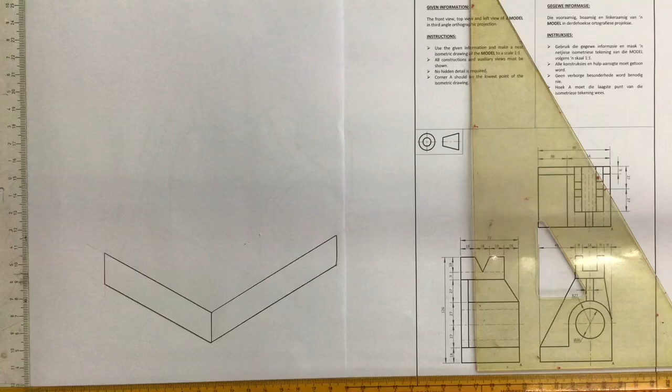Right, looking at doing this isometric drawing over here, you can see I've already drawn that base part. I've drawn a little bit of line over here, which I'm going to show you how to rub out so that you don't make that mistake.

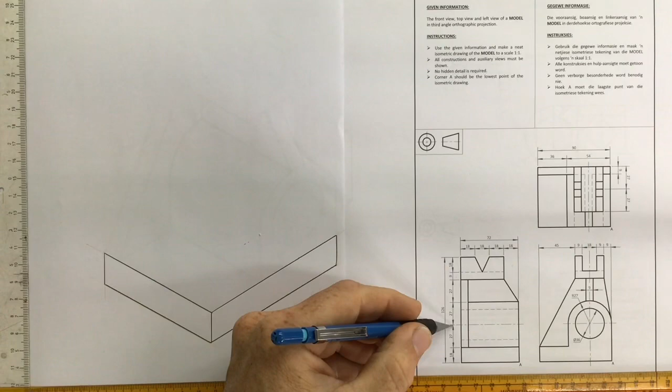The big thing here, I always like to say, find your center lines. It says that you've got 27 millimeters going up there and a radius of 27. So I'm going to take my pair of dividers and get the 27 done. Go from the corner over there, mark off your center, draw a center line going up, long dash, short dash, going all the way up.

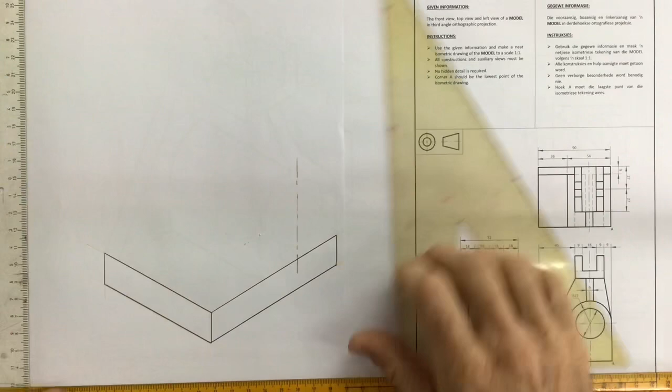And on that same line, that same 27 millimeters, swing it up there so that you find the center of that circle. Long dash, short dash, long dash, short dash, long dash, short dash, long dash.

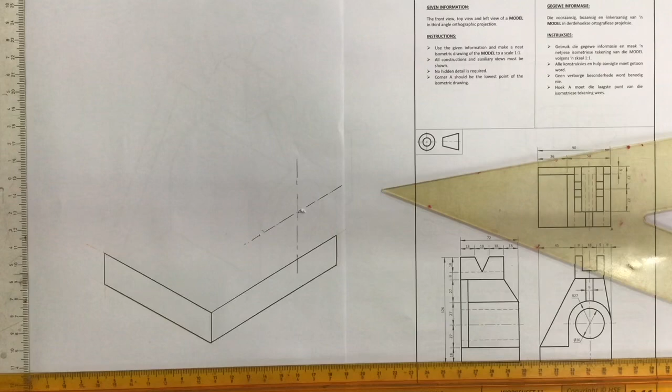Okay, take your pair of compasses, set them to 27. Place it at the center. Mark off your 27 there, and mark off your 27 there, and mark off your 27 over there.

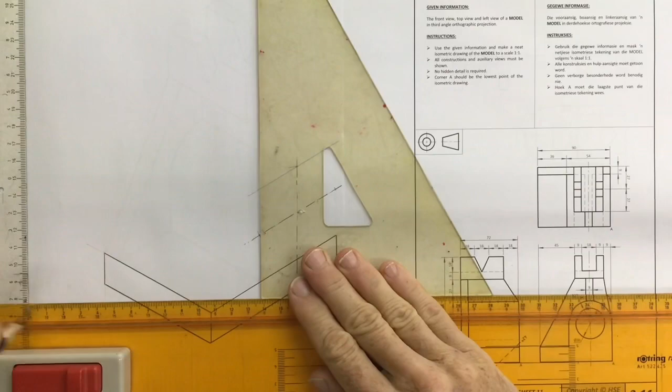Once you've got that in place, you can then draw in that square that you need in order to draw the arc.

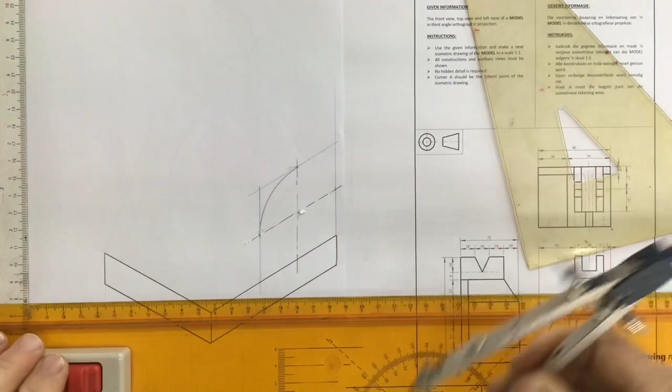There you go. Okay, once you've got that, you can set your pair of compasses to that radius over there, and you can draw in that arc successfully. Keeping that same center, you can see that this arc needs to be drawn further back over here, and you should be able to find that distance somewhere on this thing.

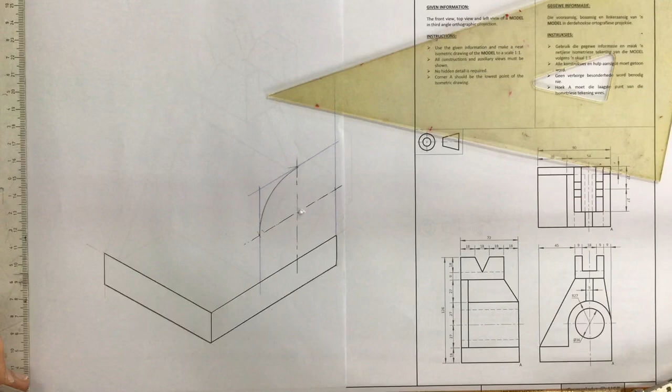It says that you've got 9 millimeters from the back there, so you measure off 9 millimeters. Coming over here, mark that off over there, and draw a line coming across.

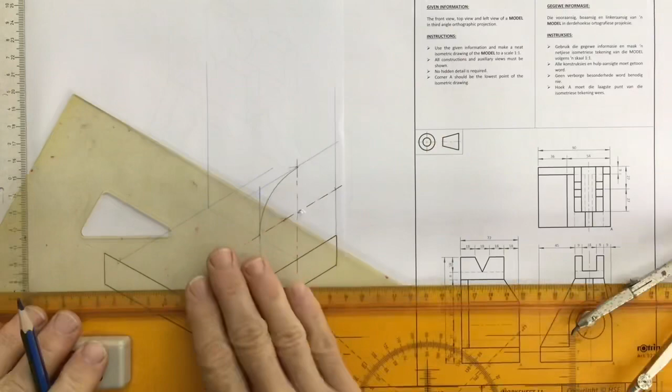You can take your center from there, going across there. Find your center going up there. Take a center line going across, draw this in dark, long dash, short dash, long dash, short dash, long dash, short dash, long dash.

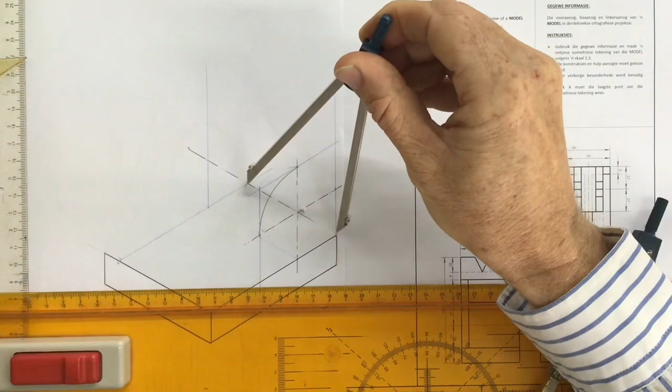And you can now measure off, using your pair of dividers, that distance over there, from there to there. Take it to that arc over there, from that corner over there, mark that off. Your radius that you just drew over there, take that back over there, and you can draw in a secondary arc going over there. All right?

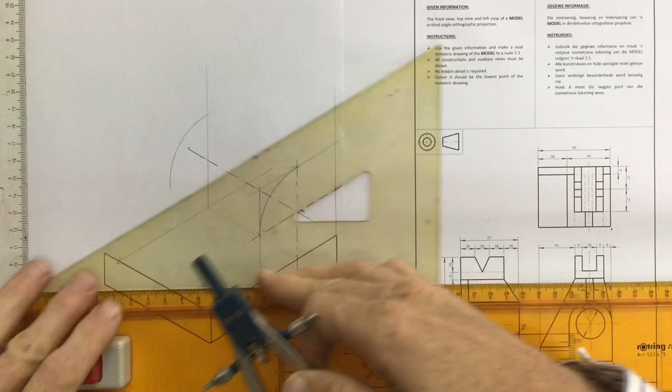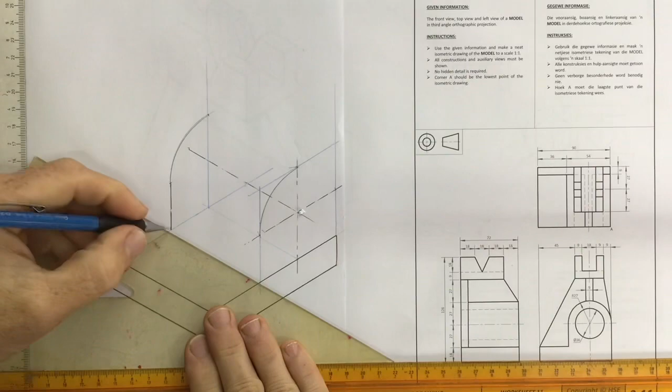That point and that point, you can darken that arc in nicely. Okay, drop a line down over here, take that line across over here, take that line up over there.

Right, we've done those two arcs. I need to find that little arc over there. I'm going to draw a construction line going across this square over here.

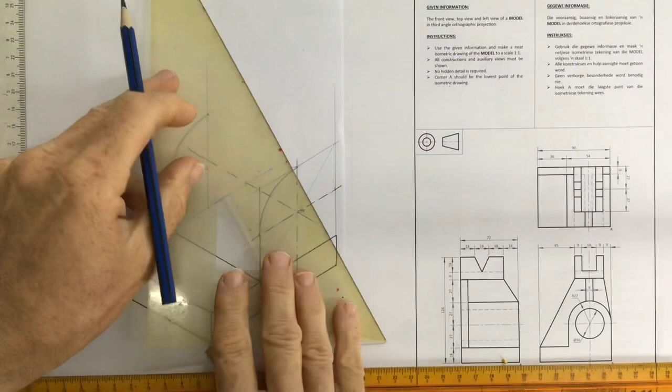I'm going to take a line, a construction line, going from that corner of the blue square over here up to the center over there. I can then take my pair of compasses, place it in at that point over there, arc that off with that radius over there, and you can then draw in that little arc over there successfully.

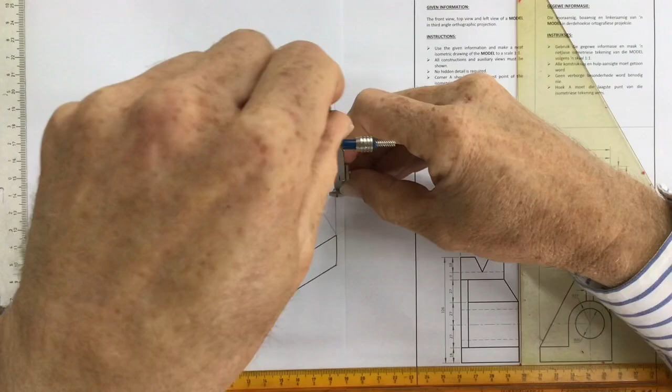Right, I don't think you'll be able to see the arc on the other side. If you were able to see it, you could then take that back, the distance between the centers over there. You draw a line out from there and make that mark.

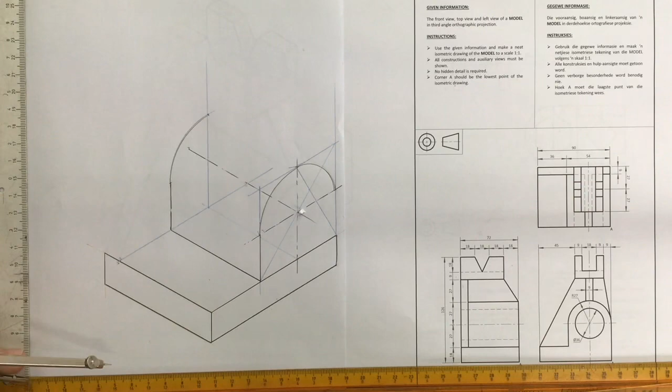Right, continuing here, what we need to do is we need to try and figure out this distance over here. It's 126, it says. I'm going to bring my pair of compasses or dividers, 126. I'm going to draw a line going from the base over here, going all the way up. Let me just draw that and measure off that 126.

Measure that off accurately over there. Draw a line coming across over here.

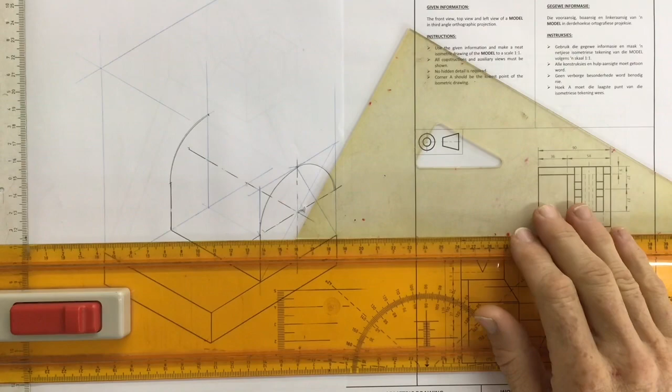There we go. Okay, it says this thing has a 72 millimeter width, so I can draw that in quite easily. Let's draw that, measure off 72 millimeters over there. Let's mark that off.

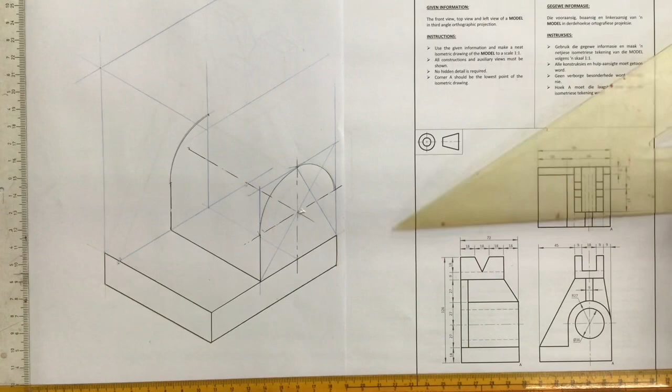Put that across. Right, okay, once I've got that in place, I need to figure out this.

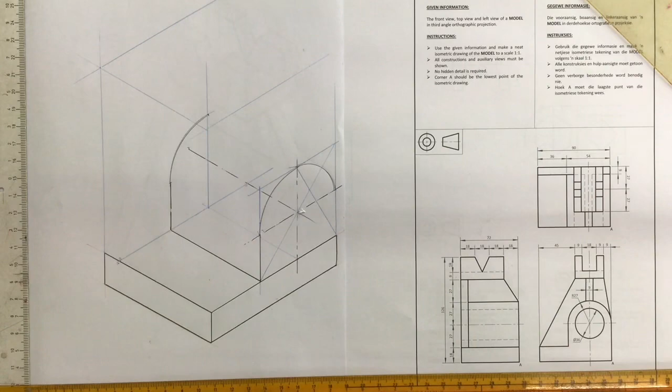45 plus the 9 plus the 18 plus the 9 plus the 9, and that gives 225. Let's just check that again. 45 plus 9 plus 18 plus 9 plus 9. It's 90, sorry, 90. Let's do that. It's 90.

Measure that off over there. Mark that. And I can now start drawing this top part first. Just going to draw a construction line coming across there. It tells me that this top part, I must go 18, 18, 18 across.

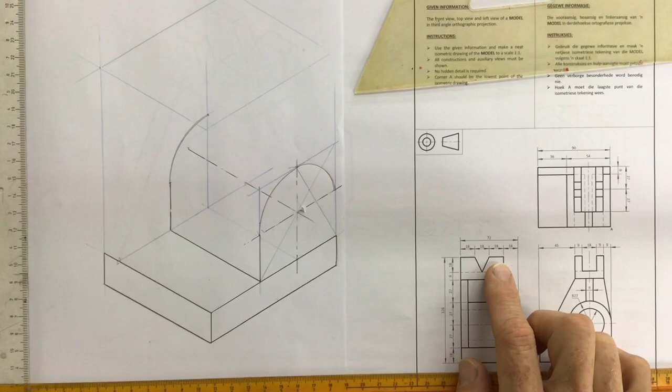So I'm going to set my pair of compasses to 18, and I'm going to go to that corner. I'm going to make a little mark. And make a little mark. And I'm going to take some lines going back this way. There we go, there we go.

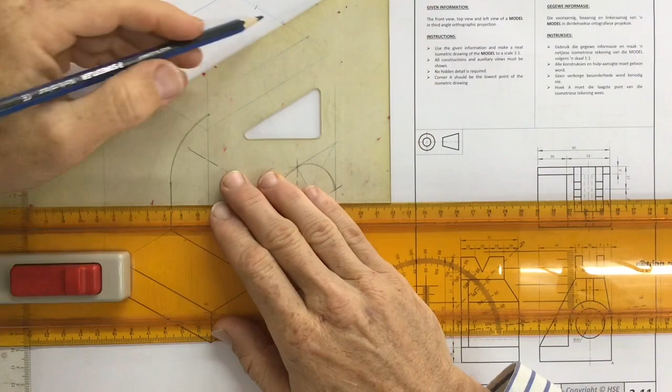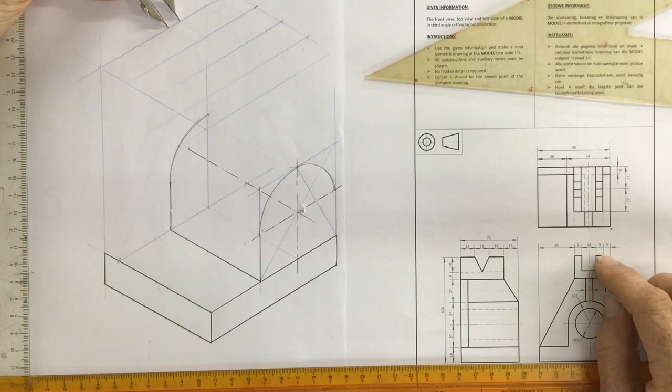There we go. And then I'm going to say 9 millimeters. Measure off 9 millimeters. It says over there, 9 millimeters back over there. 9 millimeters, then another 9 millimeters. Then it says 18 millimeters. Well, there's 9 and 9 is going to give me 18, so I pop that across. And another 9 millimeters. Take off there. Mark that off. All right.

Okay, so I've got 9, 9, 18, 9. Right, once I've got that in place, I can draw some dark lines coming across here. From there to there, and from there to there. Come across, there to there, and from there to there. Come across, there, there, across, there, there.

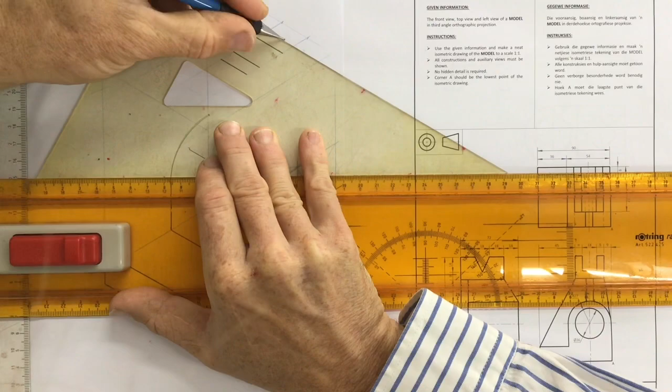Right, once I've got that in place, it says that I drop down 18 millimeters. So we measure off 18 millimeters, and I drop down 18 millimeters. Let's just drop a line down over here. There, measure off 18 millimeters. There it is, and I can now draw a line coming across over here.

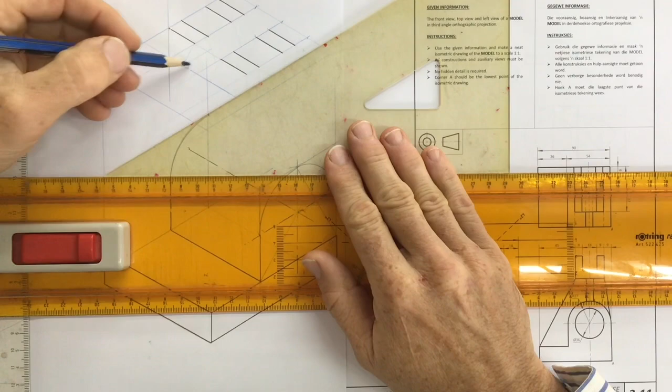That across over there. I just need to find the center of this over here. There's the center. And I can drop that down over there, finding the apex of that little triangular part.

All right, once I've got that, I'm going to take my set square, line it up there, draw a line coming down there. I can get that lined up over there on my ruler, and I slide it across.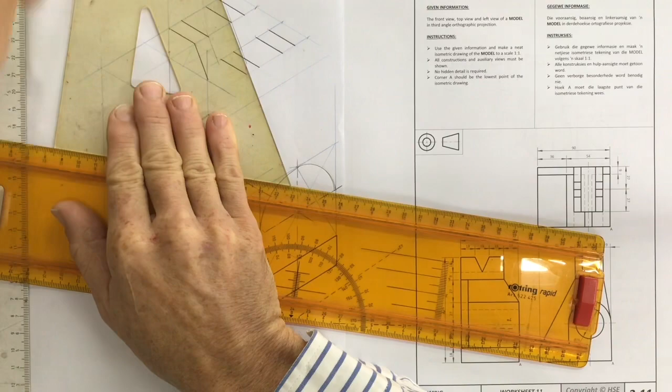Just going to do some construction lines going over there, over there. Let's just do that. And over there, those are the construction lines that I need. I'm going to do these ones over here.

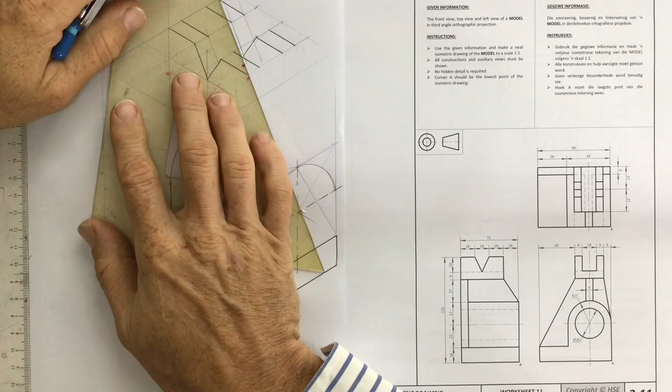This dark line going up there. Obviously can't see that one. I'll be able to see this one coming down to there. And I won't be able to see that one. I can then draw in this story over here, nice dark line there, and a nice dark line coming down to that line over there. And I can finish off the top of this.

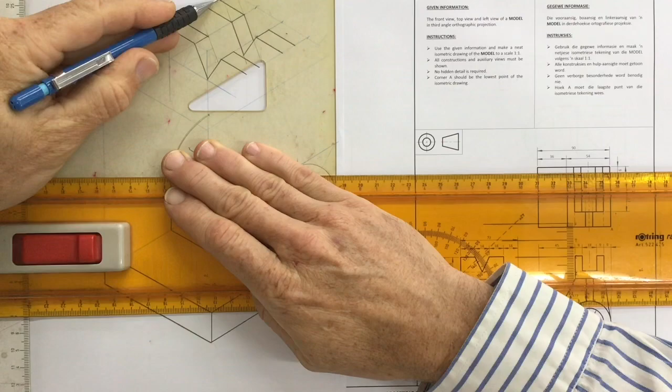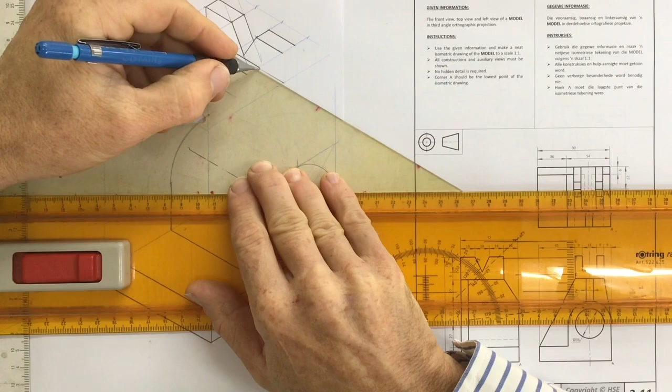Right. Let's just draw a construction line coming down from that 18 over there, and I can then finish this thing off, dropping a line coming down over there, line coming across over here, and it will end up over there. So there to there, should be able to see that, and I will be able to see that. Line coming down over there, line coming down over there.

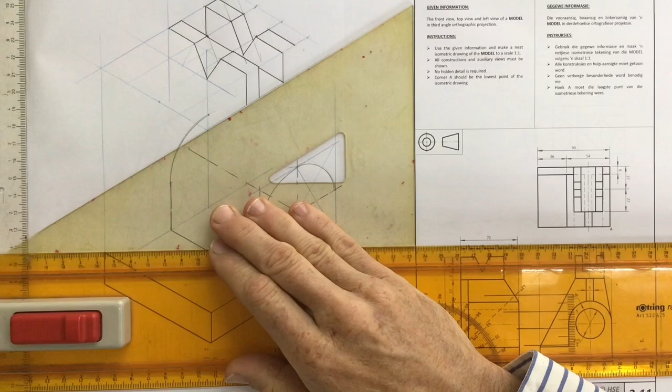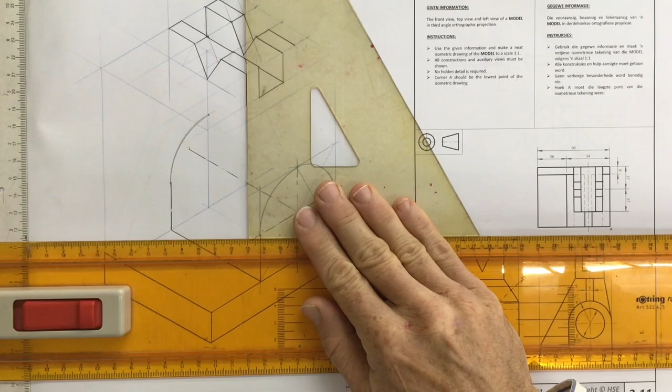Right, that is all good. That's going to drop down another 9 millimeters over there, but I can draw in this little line coming across over there. I need to drop down another 9 millimeters over here just to finish this off. Let's just draw a construction line there. 9 millimeters, take that over there, mark that over there, draw a construction line coming across, and I can then finish that off going down to that line over there, line coming down from there to there, draw a line going across from there to there.

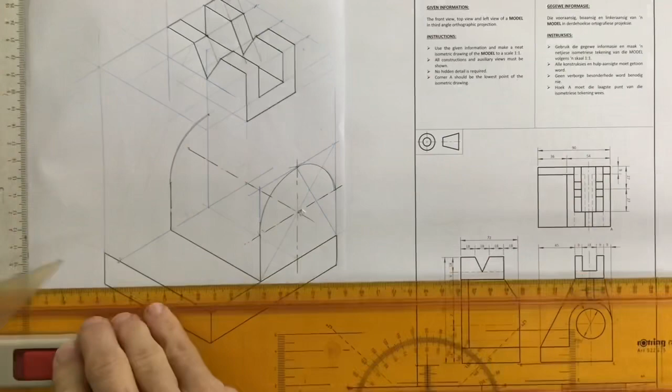Okay, once I've got that in place, this then goes across. I'm just going to draw a construction line coming across over here. And I have this little 9 millimeter story going up to that point over there. So I can link that corner to that corner over there.

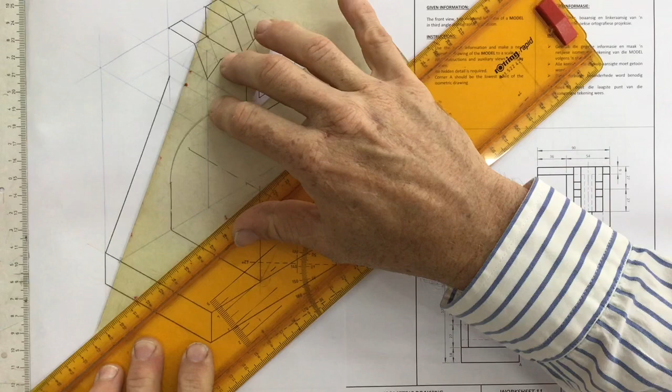Line going up to there. Take that off, place it up against the side, slide it across to this 9 millimeter mark over there, and I can draw a line going up to there. Once I've got that in place, let's finish that line off over there.

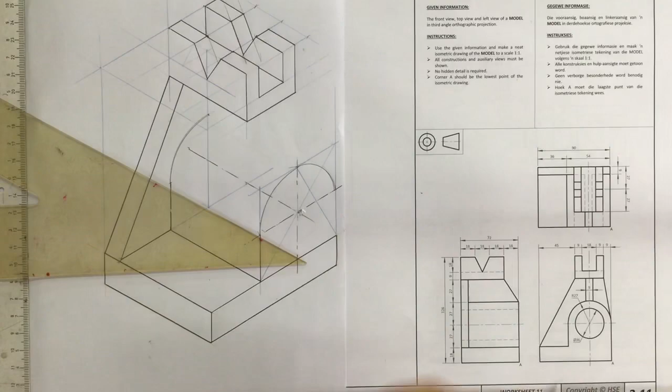This comes across, line coming all the way across over there. There's this little 9 millimeter story on either side of this thing, so that would be 4.5 on either side, 4.5 on either side of the center line over here.

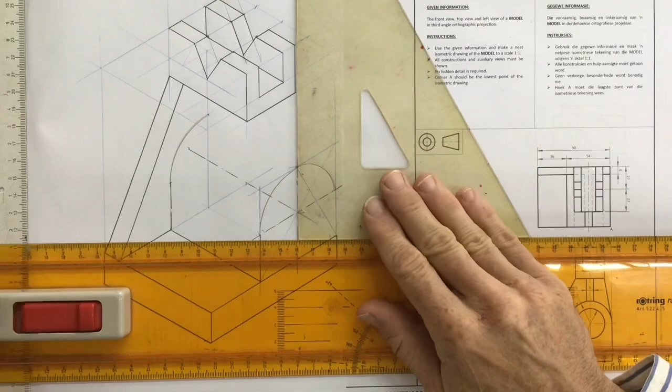I need to get that center line in on this thing as well. Just going to do a construction line there, a line going across there, and a line going back 30 degrees there to find the center.

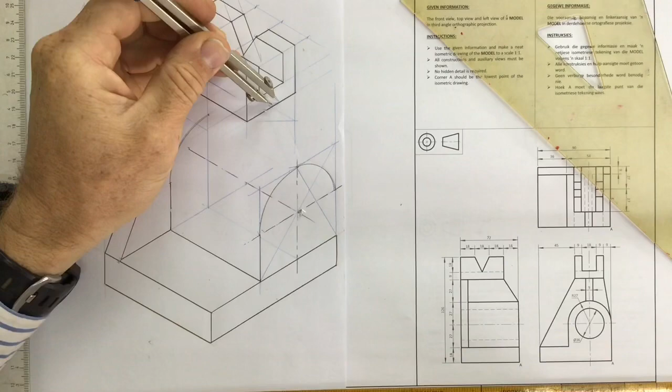Do that same 4.5 millimeters on either side of that - 4.5 there, 4.5 there, and I can then draw a line coming down at that angle over there.

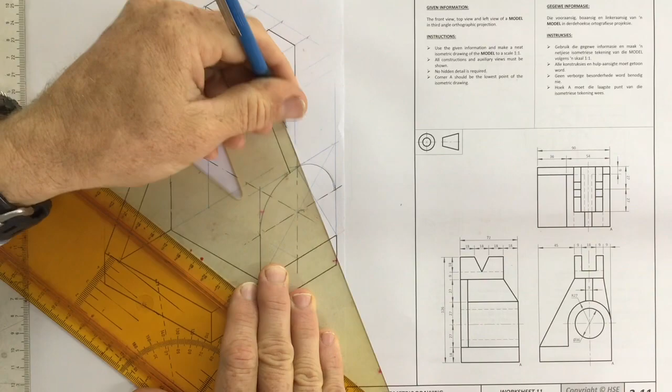All the way down till it touches the arc over there. Slide that across, all the way down until it touches the arc over there. Got a line that's going to come across over here to this point on that arc that I drew earlier. Draw a line coming up over here, and that is basically the drawing done.

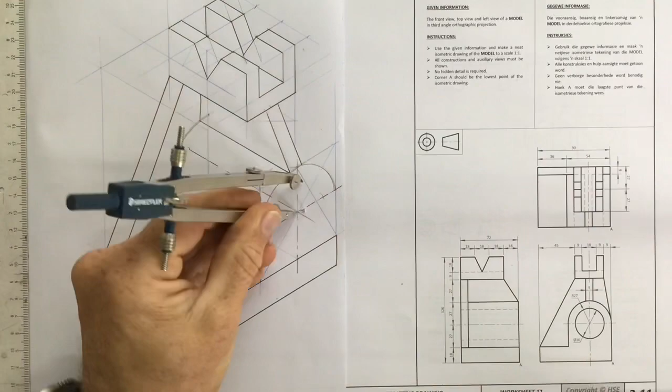All I need to do is put that little circle in there. It says that it is a 36 diameter, so I can set my pair of compasses to a radius of 18. Go to the center over there, mark that off, mark that off, mark that off, 18, 18, 18, all on the center lines.

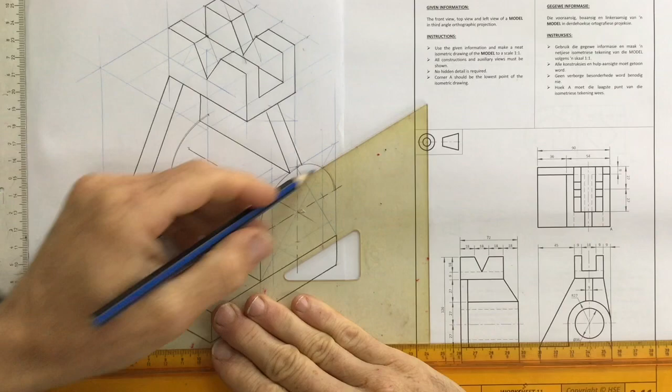Come over here, draw that construction line, little square story. Obviously, if you've got a circle stencil, an isometric circle stencil, please use it, it will be much quicker than doing what I'm doing here. If you don't, well, this is the quickest way you'll be able to do this.

Take that in there, extend your pair of compasses to that center, it should link up with that center. Draw that arc over there, turn that round, go to that center on that corner of that square. Those two centers then should link up.

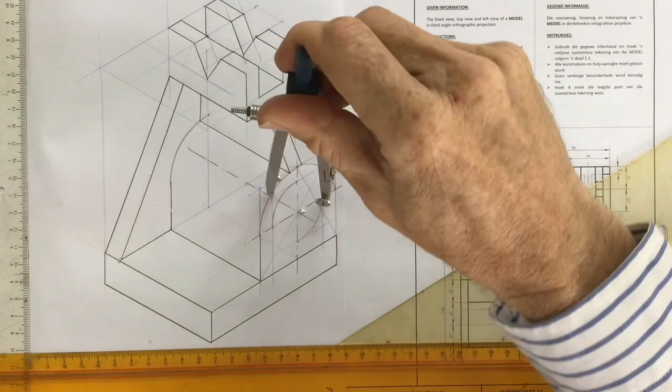Draw that in place, and then you've got this little center over here, which you can see is going to need to be drawn from that corner of the square up to the center over there. Draw a line going up over there.

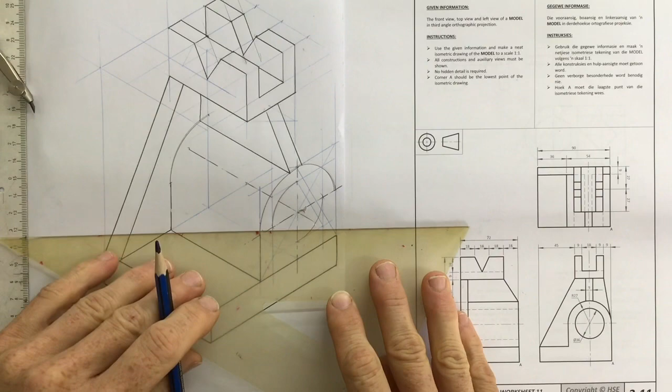Draw a line going up over there, and I should be able to find my centers for the two little arcs that I need to finish this circle there. Right, there we go.

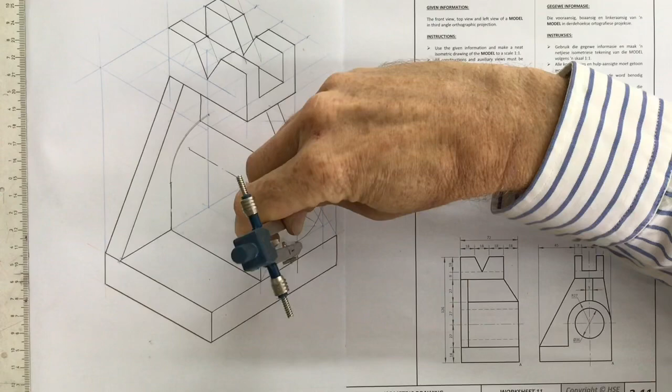Draw that in place, and come over here and draw that. Draw that in place. Sorry, this compass is not set properly and I'm bouncing out of the page. There we go, there we go.

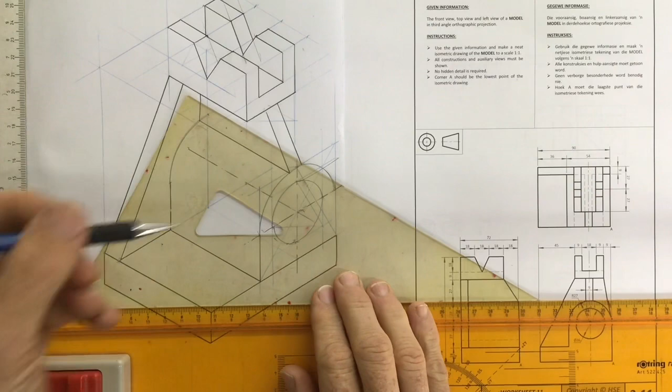Right, there it is. There's this last line that I need to draw in over here. What you're going to do is take your set square, slide it across until you make a tangent to that circle, and draw a line which goes across and just touches at that point over there. This little line over here needs to be drawn in as well.

There you go, and that's everything that needs to be done on this. The very last thing that we need to do is just rub out this line over here that I put in at the beginning. Dark, remember, just rub it out.

Once it's rubbed out, if you've got any lines that need to be repaired, just draw them in properly so that you don't lose any marks on that sort of stuff. There you go, that's going in there, and life is good.